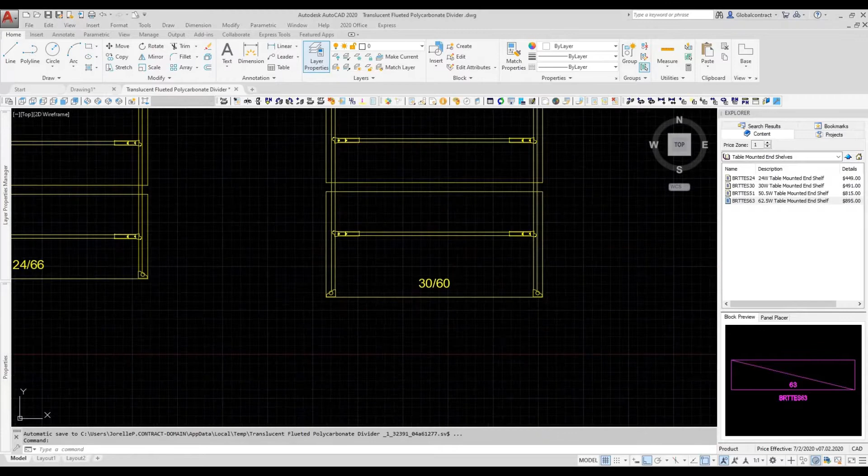It's just telling you the gaps. The 1 inch, approximately, is basically between the two back-to-back work surfaces. As you know, it will be overhang, and the radius and trim is charcoal finish only.

So I just placed some bridges tables and the old and new height adjustable tables. For Bridges, it is located under GCT, Global Contract. CBG represents the code for Bridges 2.

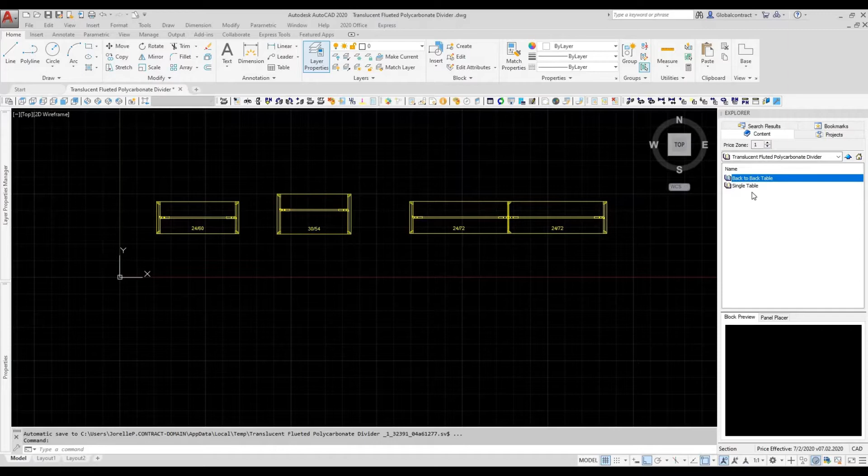It will be under dividers, and below here, translucent fluted polycarbonate divider. So when you're specifying, you will need to determine if it's a single or a back-to-back table.

Let's go to single table. Here it will ask you if you want to specify the 24 high or the 30. I'm just going to put a 30 high on this 24 by 60 work surface.

It will ask you then if it's for a 24 deep or a 30 deep. This one is a 24 deep, so I'm going to choose this. Now you will need to know what's the width of your work surface. This represents the width, so it's 60. I will need to choose 60.

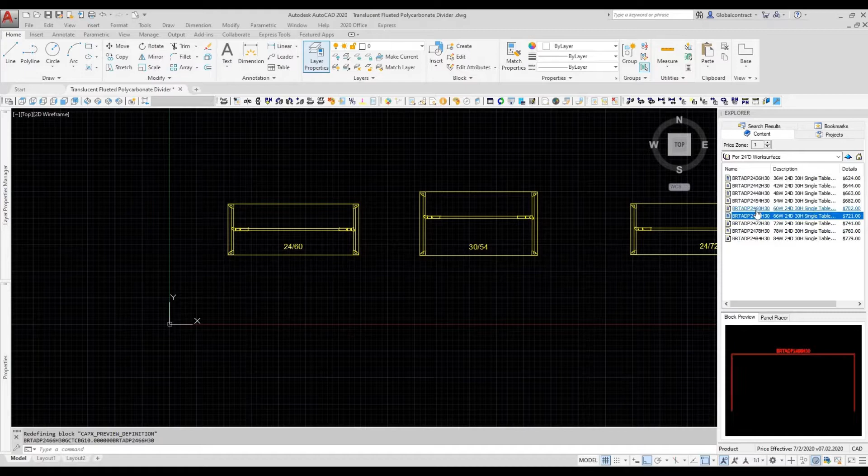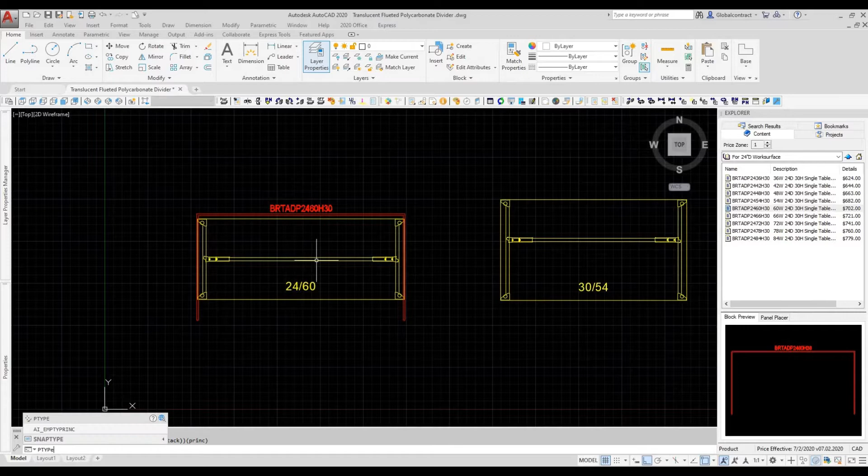So the insertion point will be at this end. In order to show you the nodes or the point better, you can type in PTYPE and then enter. It will ask you which point style you want, so I'm going to choose this so that I could show it to you better.

Next, I'm going to put a 24 high on this 30 deep, 54 wide work surface. Let's start it again. This is a single, so I need to go to single table.

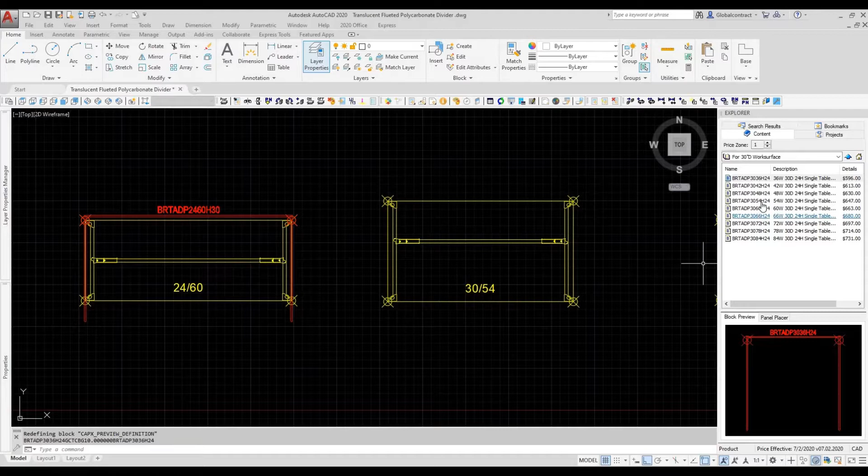I said I want a 24 high, so I'm going to choose this. This is a 30 deep, so I will choose this. Now I will need to know the width. This work surface is 54, so you will need to choose 54. Insertion point is at the end of the work surface.

Just to let you know how we determine this coding: BRT represents the bridges code, ADP represents the code that we assign for the divider. The first two numbers represent the depth. 54 represents the width. Then H is height, and then 24 - so H24 represents a height of 24.

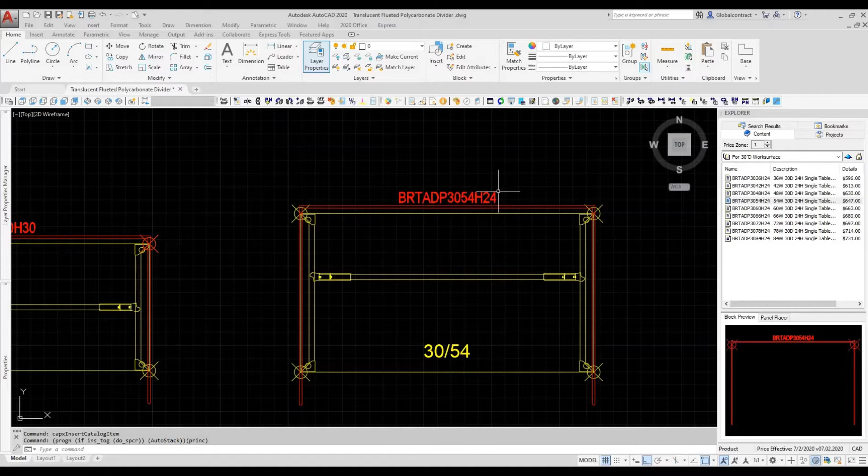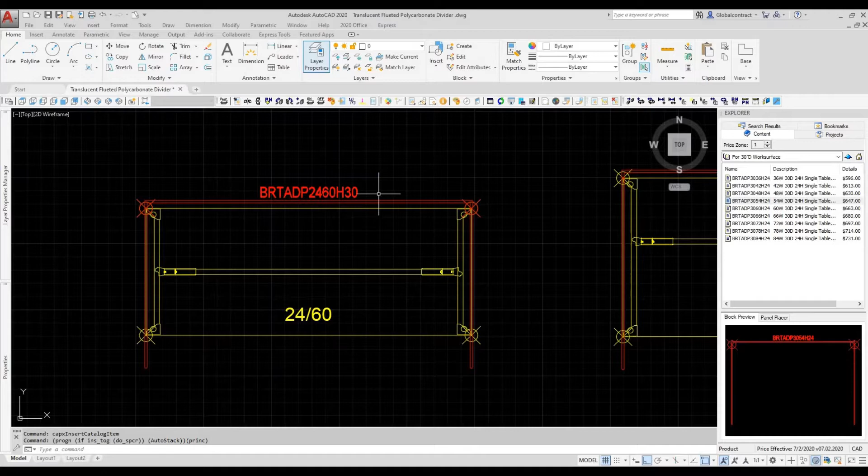Similar to this, BRT represents the bridges line, ADP represents what we chose for the divider. 24 is the depth, 60 wide, and height of 30. So now let's go - what if you have multiple tables side by side? Let's start it again. Single table - this is still a single table.

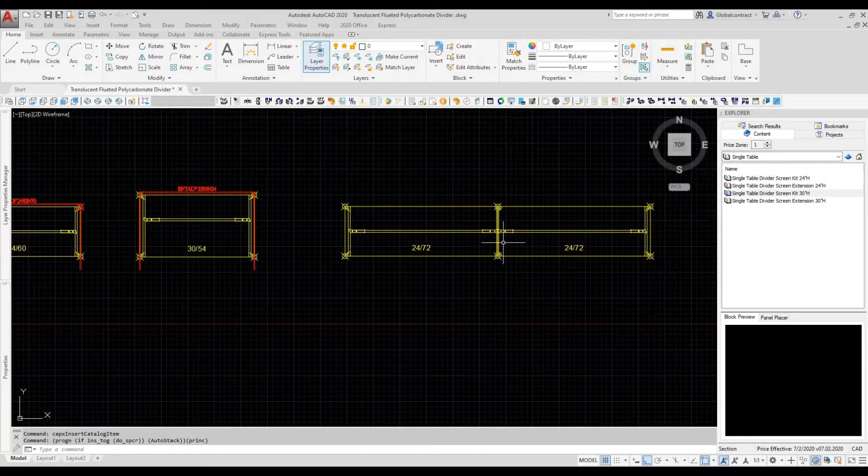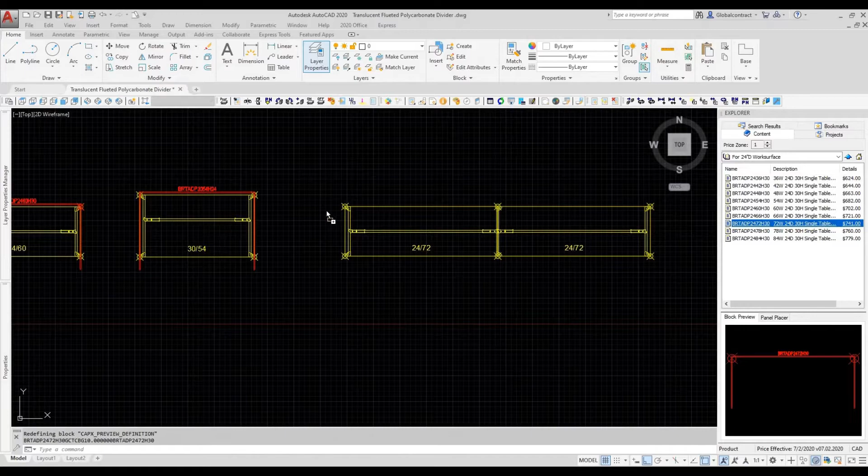So I'm gonna choose a 30 high for this. And then this is a 24 deep, so for 24D, that represents deep. And then this is a 72W, so let's specify this. Same thing. The node will be at the end, so that will be the insertion point for this.

So next, let's get the extension for this. Let's go back. So same, this is single. This is 30 high, as you can see, H30 high, 30. But now we need an extension, so you need to specify this. It will ask you if it's 24 deep, and then 72 wide, so we need a 72 wide, which is this one.

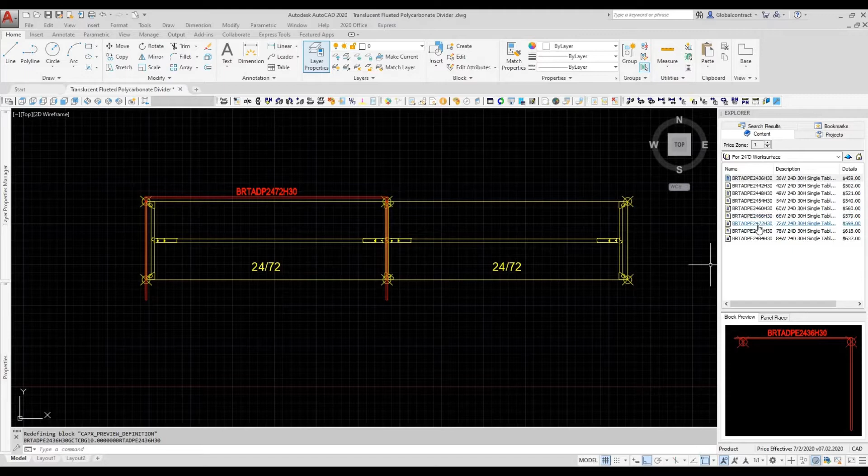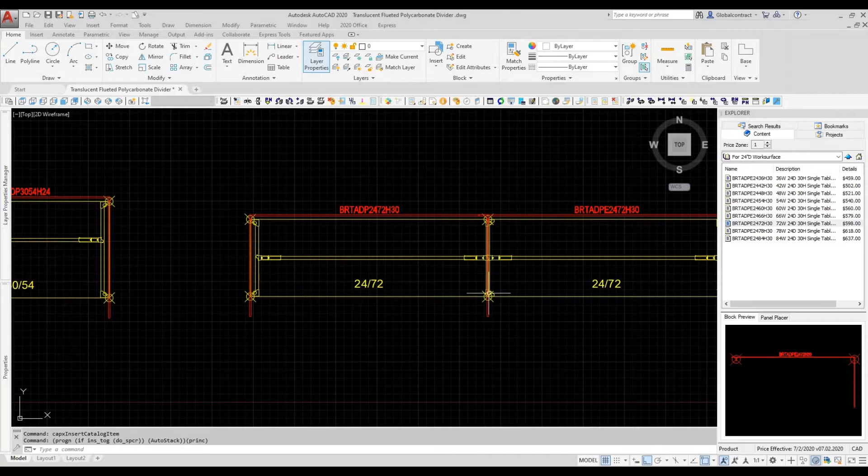Insertion point will be in the middle. And there you have it. So this is good to go. So that's how simple it is to specify this fluted. So all the connecting bracket will be included. Let's see this on a 3D view.

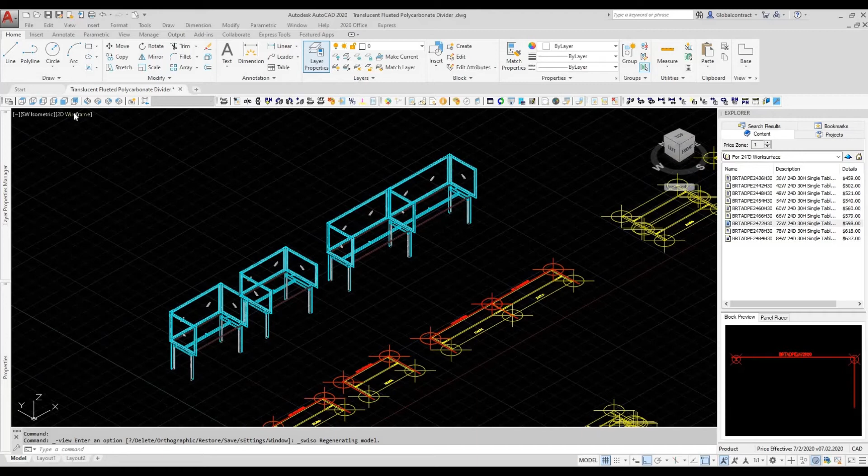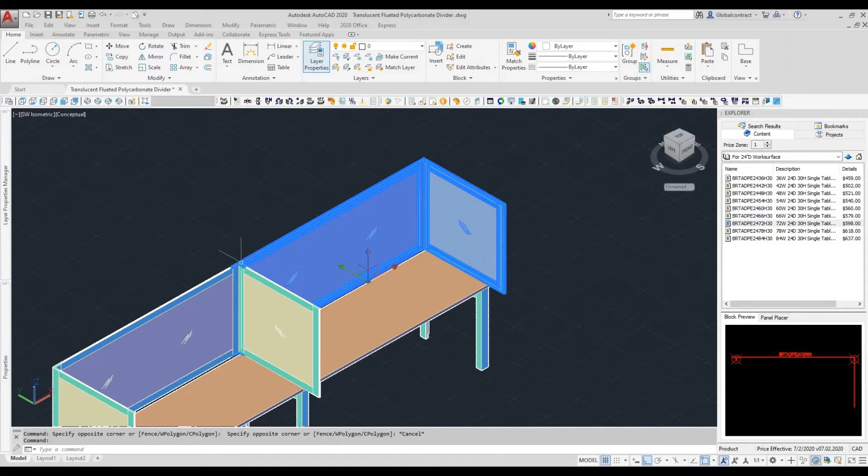So that's how it looks like. So it comes with the bracket. So we call this P bracket. So the kit will come with that. And even with the bracket, the C bracket, that's what we call this, the one that wraps around the work surface.

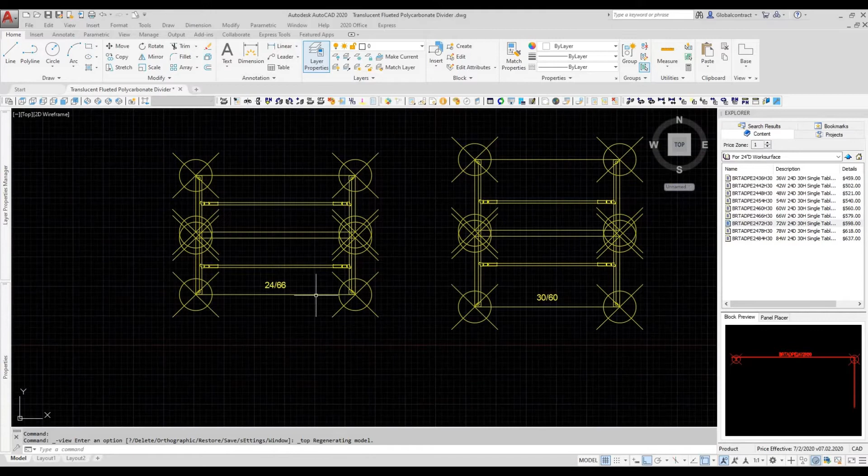So let's go back. So now what we have here is the back-to-back work surface. So now let's go back here. So because this is a back-to-back, we need to go to Back to Back Table. So now you choose if you want a 24 high or a 30 high, whatever you want. So I'll choose 24 high.

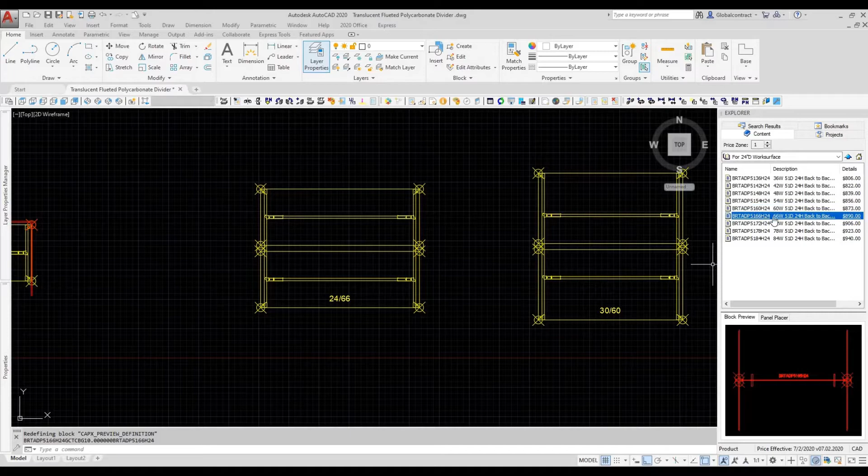It will ask you again for the depth, so this one a 24, and this is a 66 wide. So I'm gonna choose 66 here, which is this one. Insertion point will be this node. So basically this corner of the work surface.

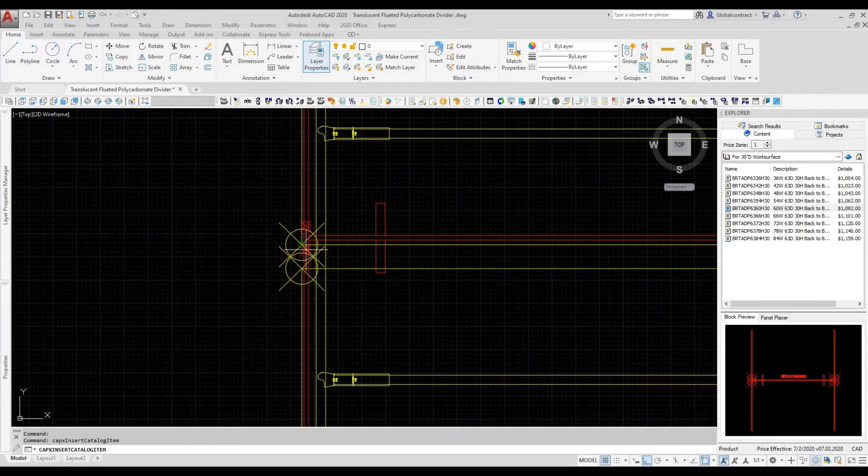Let's do this one. So this is a back-to-back work surface. Let's go with 30 high. This is 30 deep. And then now this is 60 wide. So we need to see, you can see it from the description as well. So 60. Same thing, the insertion point will be on this corner of the first work surface.

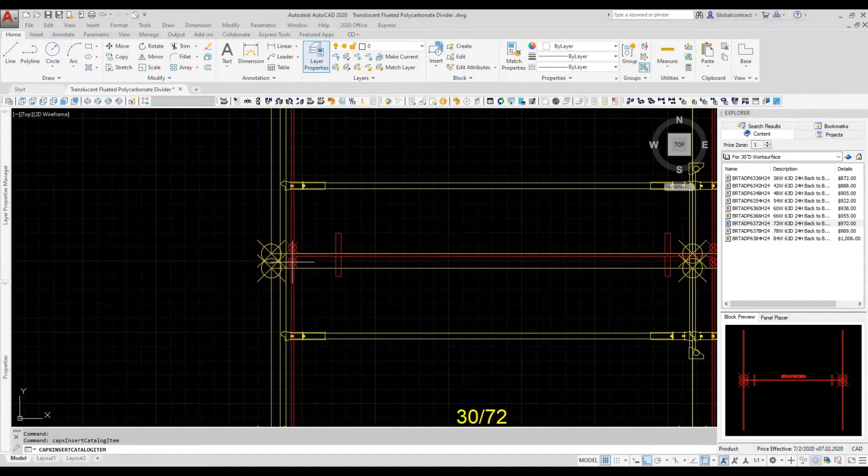So next, a back-to-back 4-pod work surface. So back-to-back table, let's put in 24 high. So we need to specify first this. This is 30 deep, so specify 30 deep. And this is a 72 wide work surface, so we need to use a 72 wide. Insertion point, same location, the first work surface, and it will be in this corner.

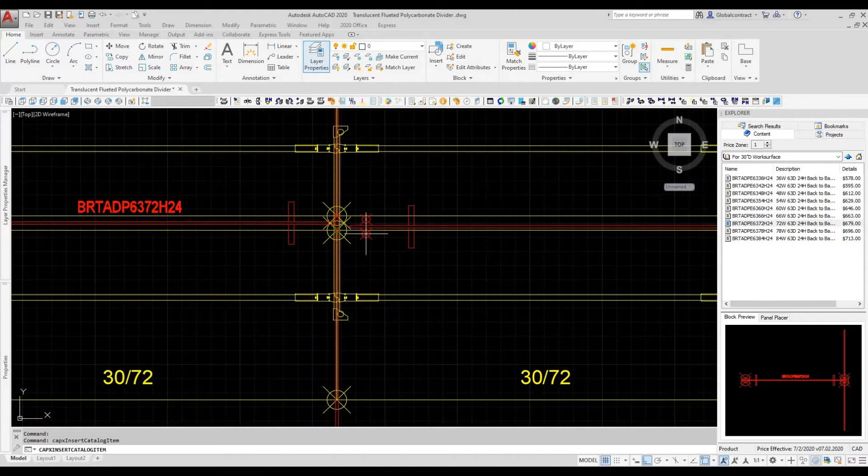Next, we need the extension. So we use a 24 high, I know that because H24. So now we need an extension. This is 30 deep, and then this is a 72 wide. Insertion point will be in the middle of this.

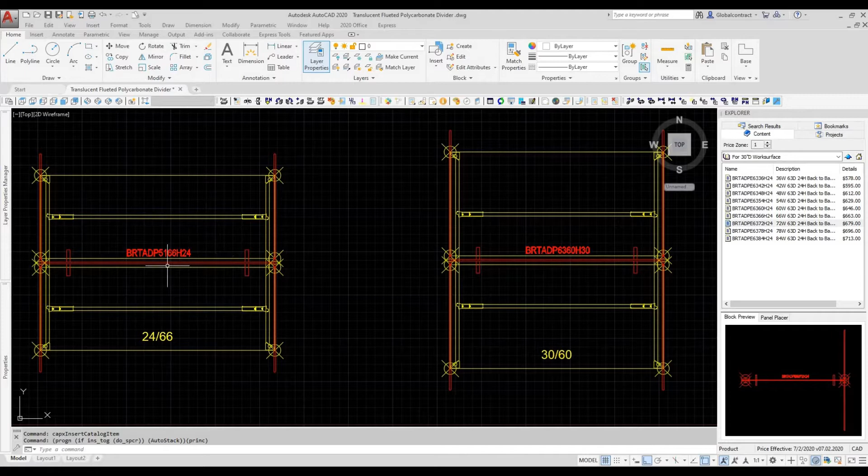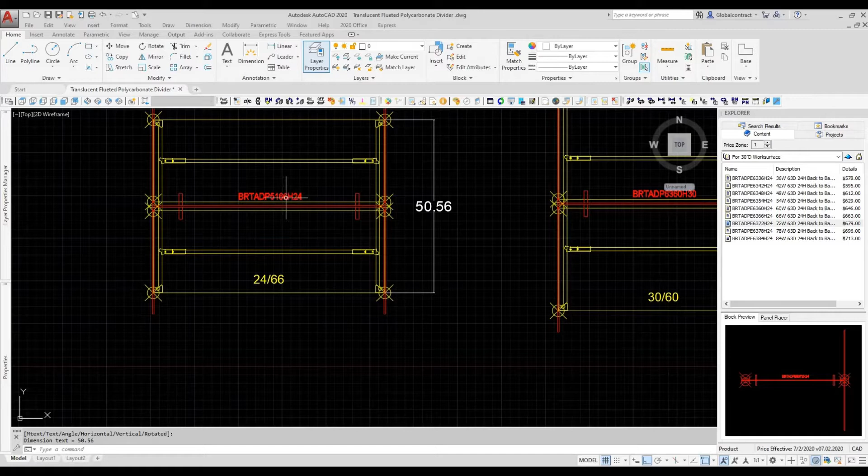So let's understand the coding for a back-to-back work surface. BRT is for the bridges, ADP is for the divider, so that's our code. 51 if it's a 24 deep. Why 51? Because that's the total dimension for our back-to-back, so 50.5, so we put a nominal size to round it up. So 51 for this, and then 66 represents the width. And then H24 is the height of the divider from work surface at the top and to the top of the divider.

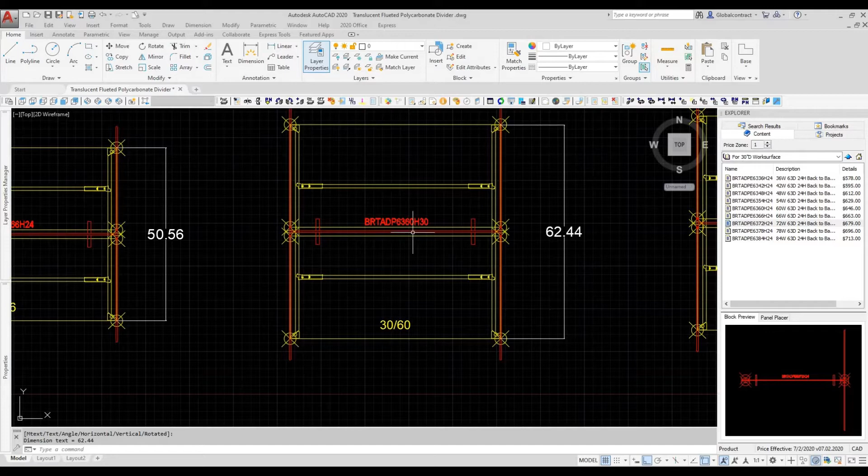Same as here, BRT, ADP, and then it will be 63 if you have 30 deep work surface. And then 60 will be the width, and then H30 represents the height of the divider. So this will be 62.5, which we round out to 63 for nominal size.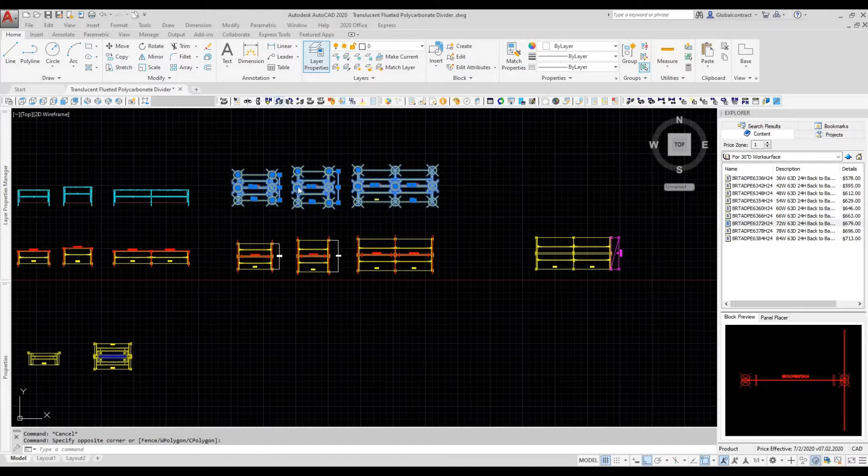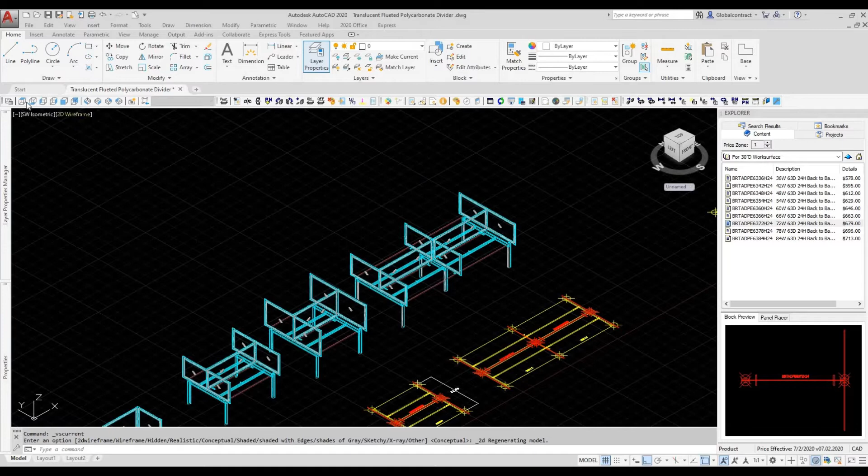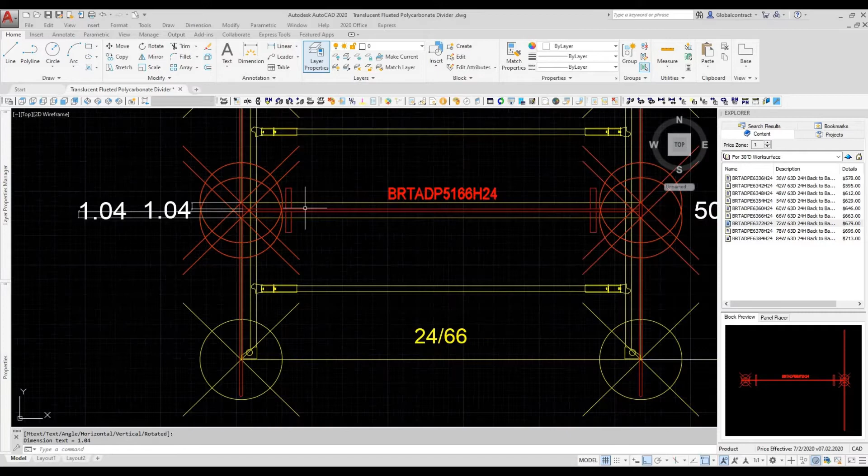Let's check this on 3D view. So for back-to-back, this will be the look. Also, let's put a dimension from here to here. As you remember, in the key features, it said that it's approximately 1 inch. So you have a gap of 1 inch at each side, so it's more than enough for cords and those kind of stuff.

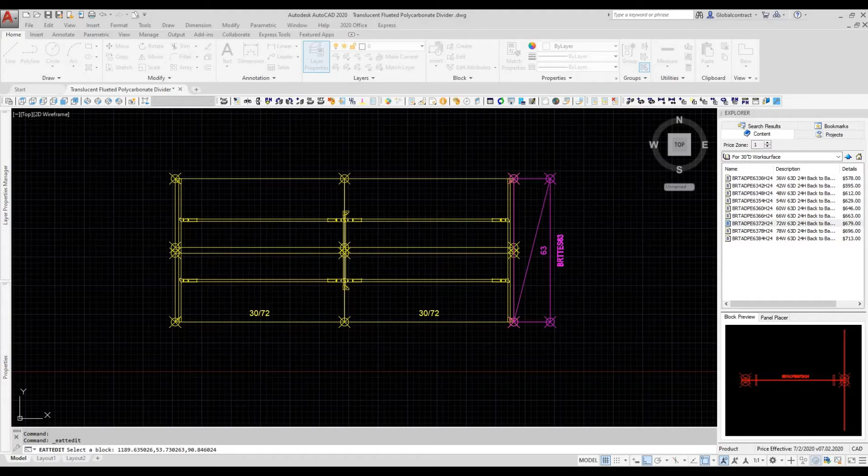So what if you have this situation where you have back-to-back 4-pod, but you have a shelf. So this shelf is called the table-mounted end shelf. So this is the look of that.

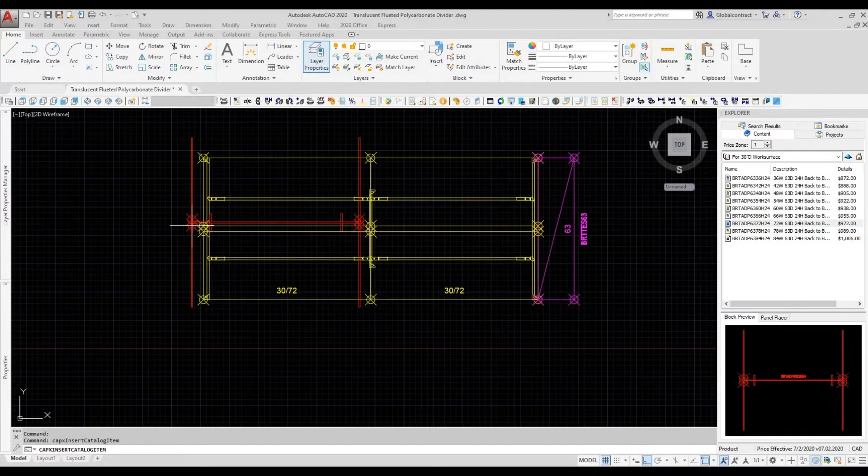So in this way, let's specify the dividers first. Back-to-back, I'll just choose a 24. This is a 30 deep work surface, and 72. Let's specify the extension, 30 deep and 72. Let's look at it on 3D.

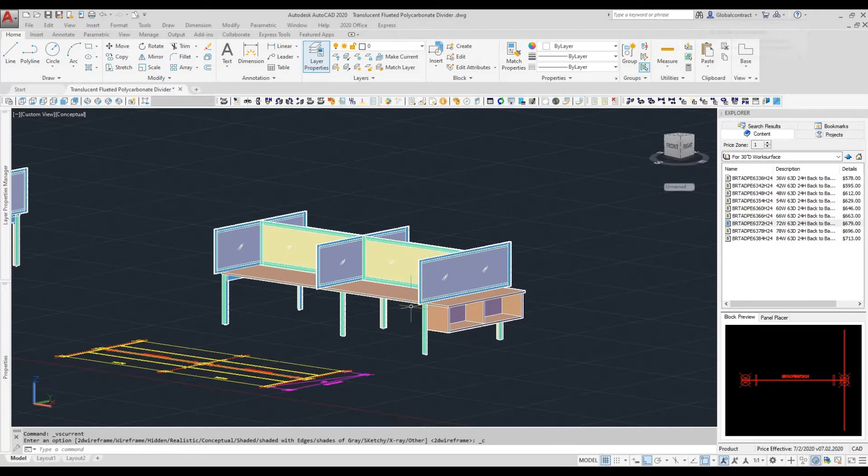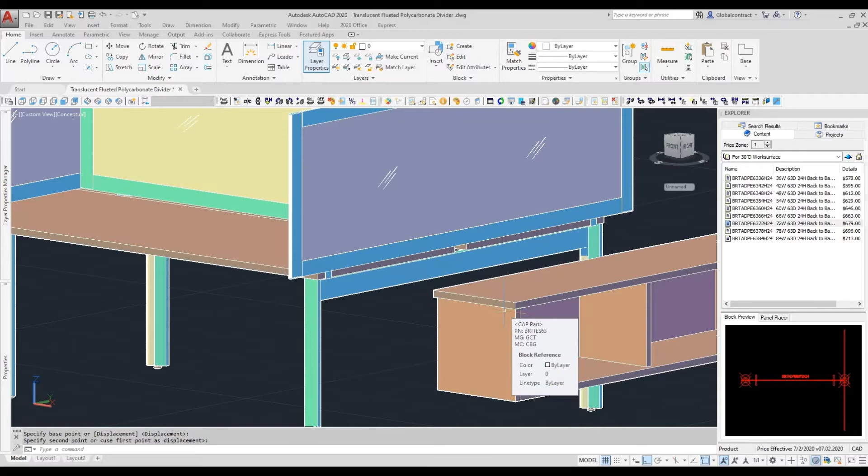So here we have a situation where you want to add this end shelf for bridges. What happened is the bracket will interfere with the installation of this end shelf. So we told engineering about this issue and they came up with a kit to change the bracket. What they asked us to do is specify the BRTM kit, and that will fix the issue. It will come with the bracket that will fix it, and you will be able to install the shelf.

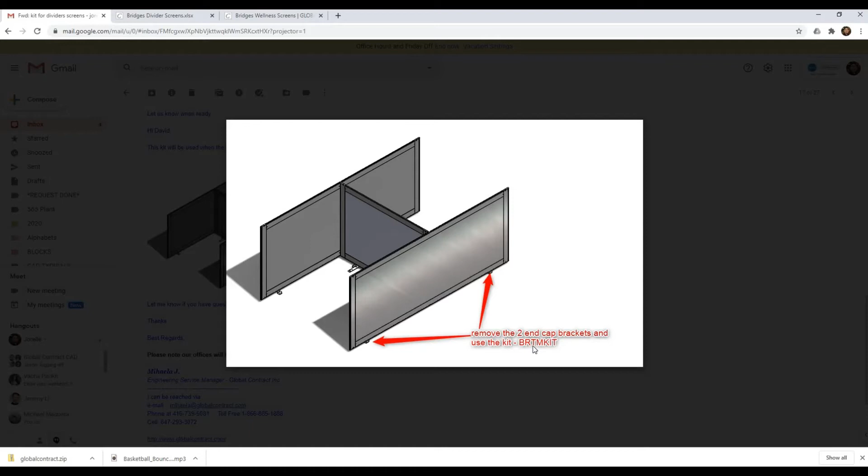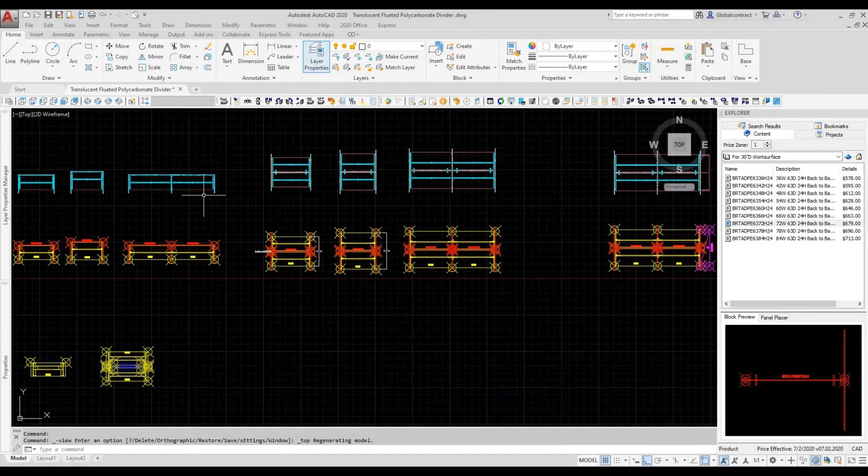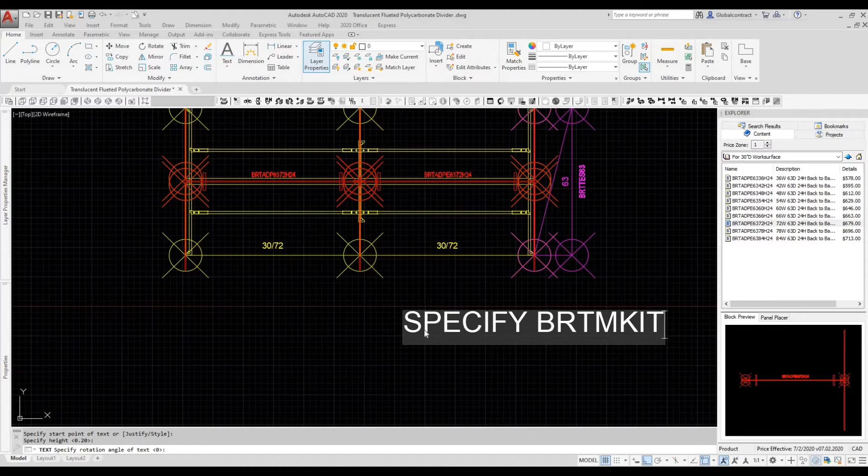In terms of pricing, you can email us with the price. This one will not be on the price list, but the good thing is you will be able to specify this or just manually add it to your BOM. For now, message us if you have those kind of situations. We'll be able to help you and provide you with the pricing. Now at least you have the code for this application. Let's put a note here: email us for pricing.

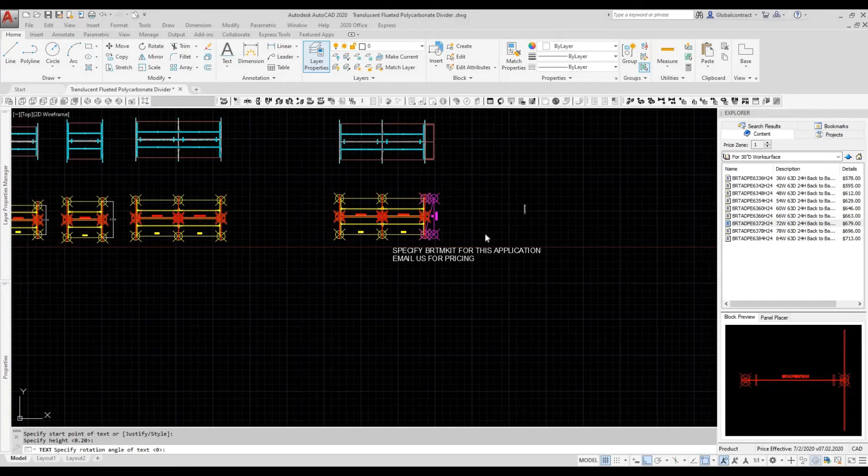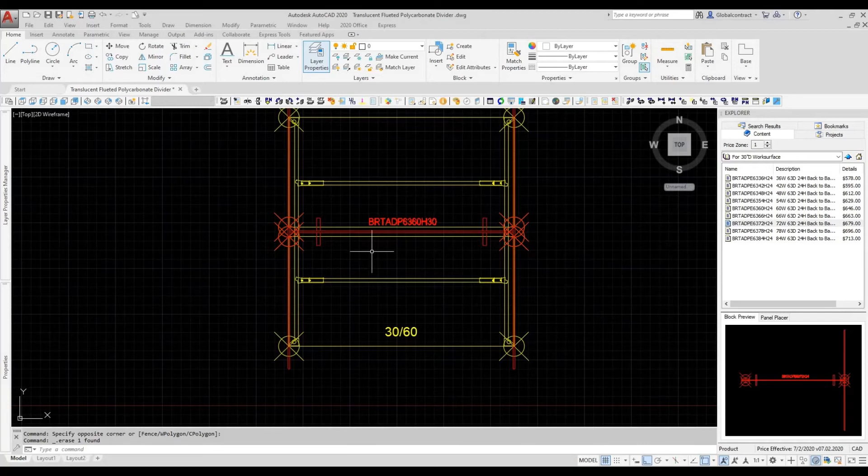So next situation is, what if you want to add a ceiling post for this application? Right now we have 63... deep, or 30 deep each, and a 60 wide work surface. Now let's delete this first.

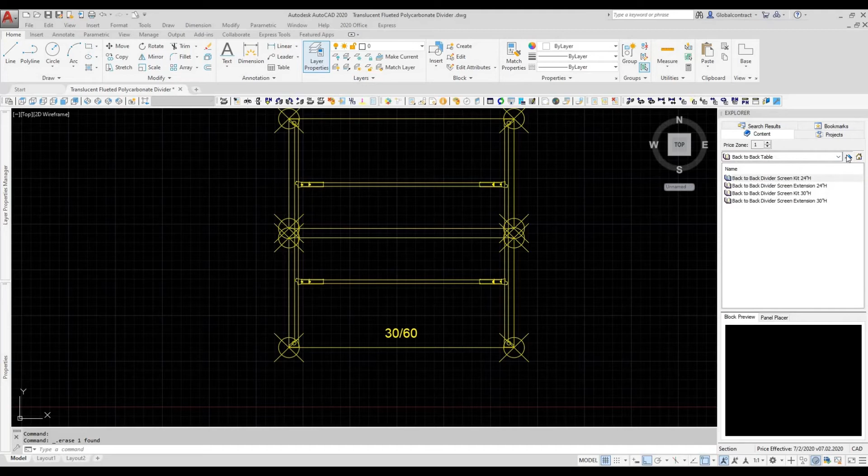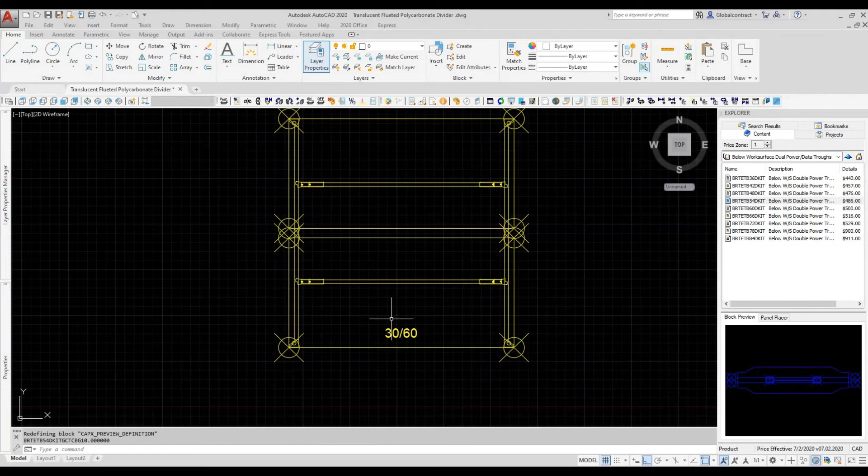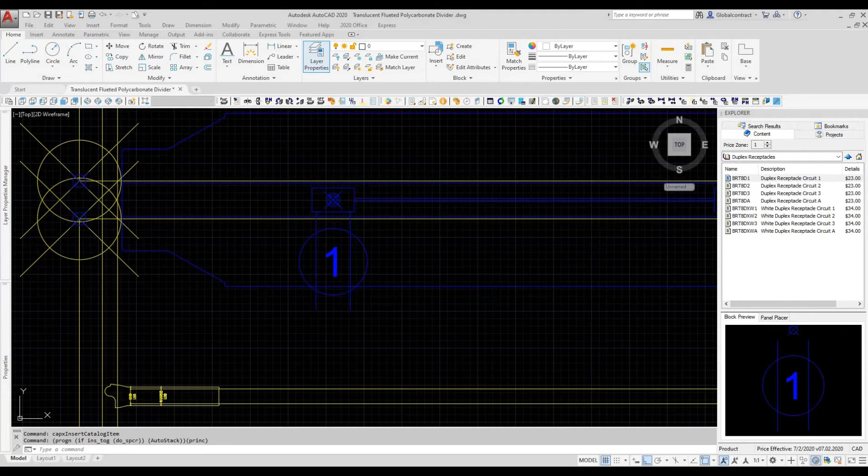Let's add in the electrical. Let's go to electrical. The fluted divider only works with below power. So here we have 60, so below power, below housing, we're going to use 60 as well. Let's add in our duplex, so 1 and A.

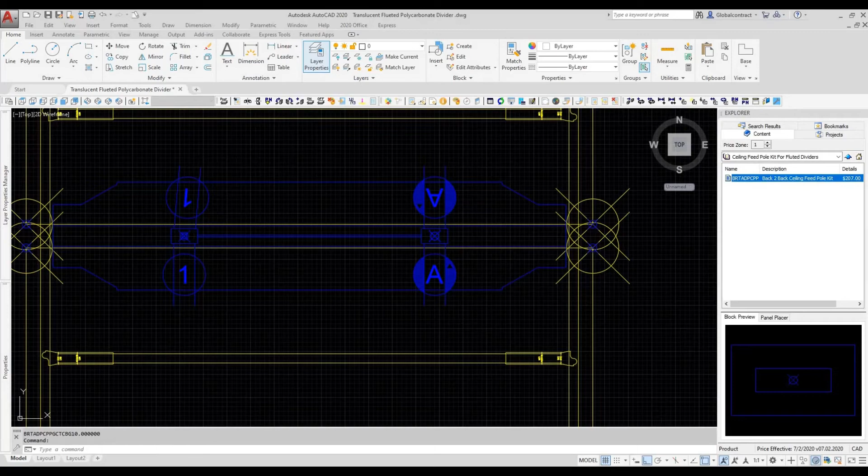And let's put in our post. It will be located right here, ceiling pole—we have the standard and we have the ceiling pole for fluted. So choose this and just place it right here.

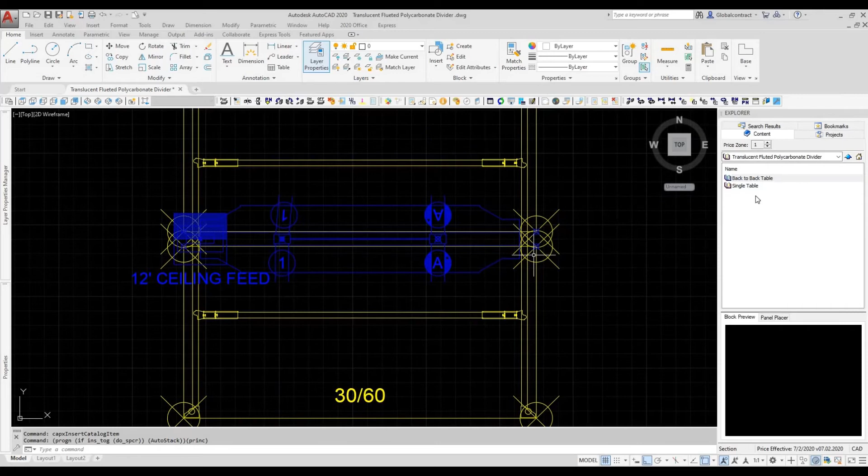Let's add in the ceiling feed, and then we need to add the dividers. So this is a back-to-back, either 24 or 30 high—I'm going to choose 24. This is a 30 deep, so this is a 60 wide work surface. But if you're putting a ceiling pole, you will need to specify 6 inches shorter, so you will need to specify a 54 with this.

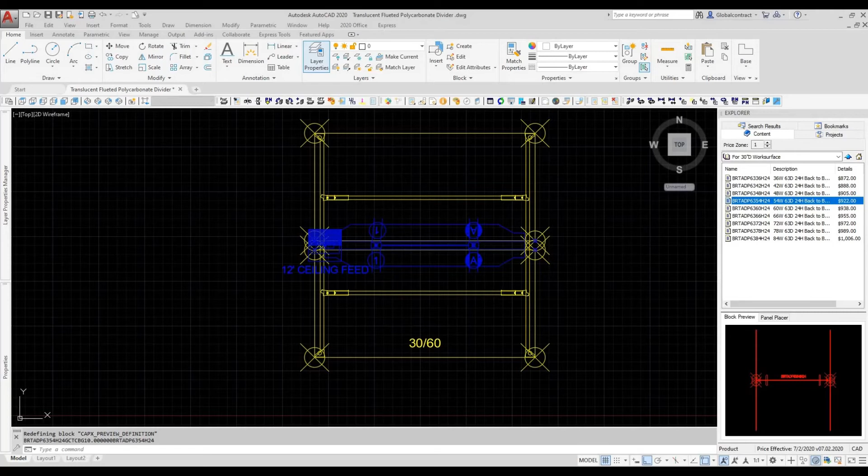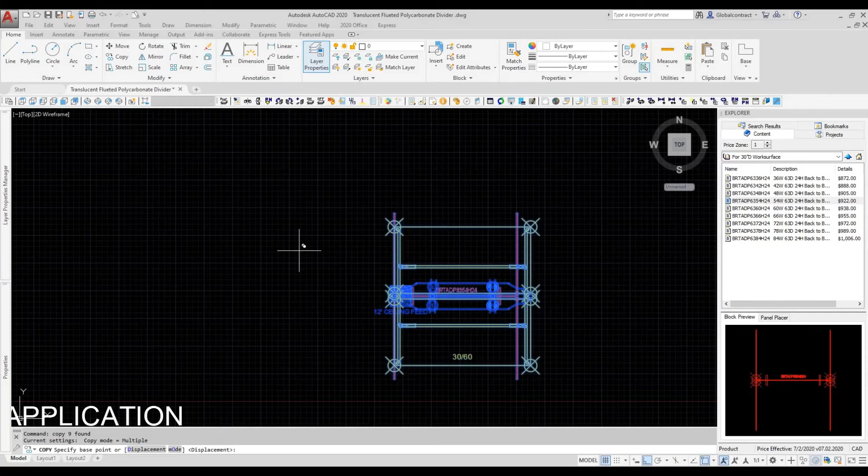So now it will look like this. At the moment, we don't have changeable graphics that will fix this, but at least you'll know that this will work. What you can also do is copy this, make this 3D, and just select the dividers and then explode it, or use this.

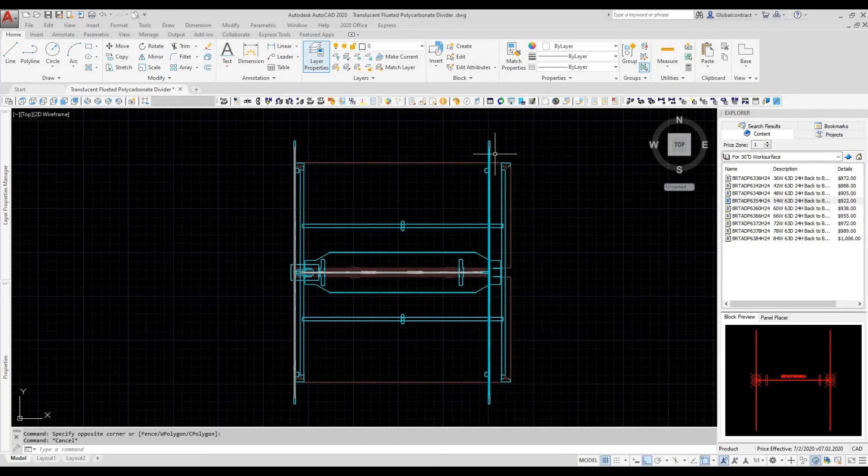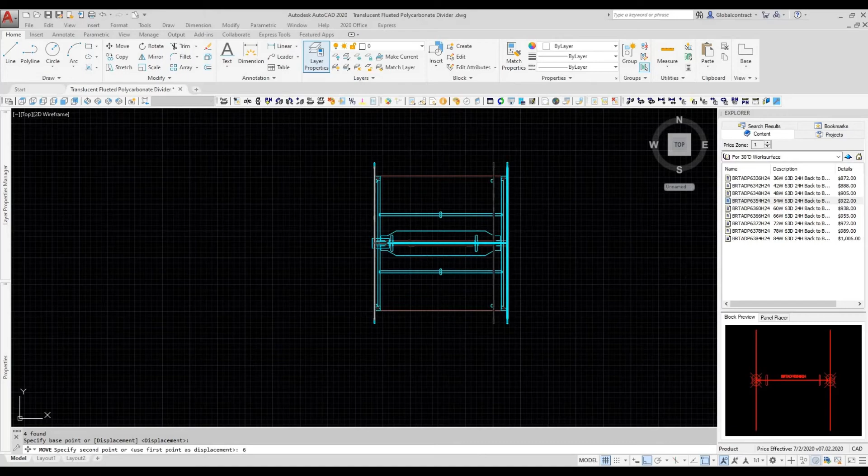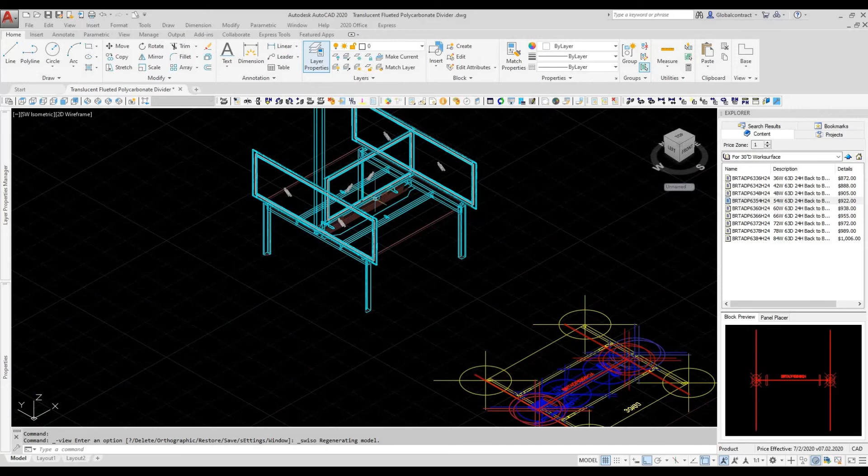So now you're able to move this. Let's move this and the one in the middle. Type in move, and then just move it 6 inches. Let's move this as well—move 6 inches. Let's look at it in 3D. And there you have it.

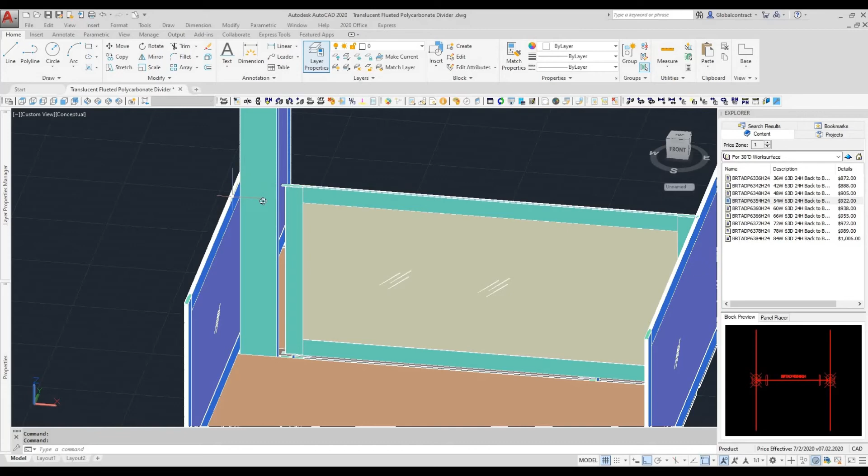So when you specify the post for fluted, it will come with the bracket to replace this and another bracket to hold this divider. So it will come as a kit as well.

So next, let's just put a note here: 6 inches shorter if with a post.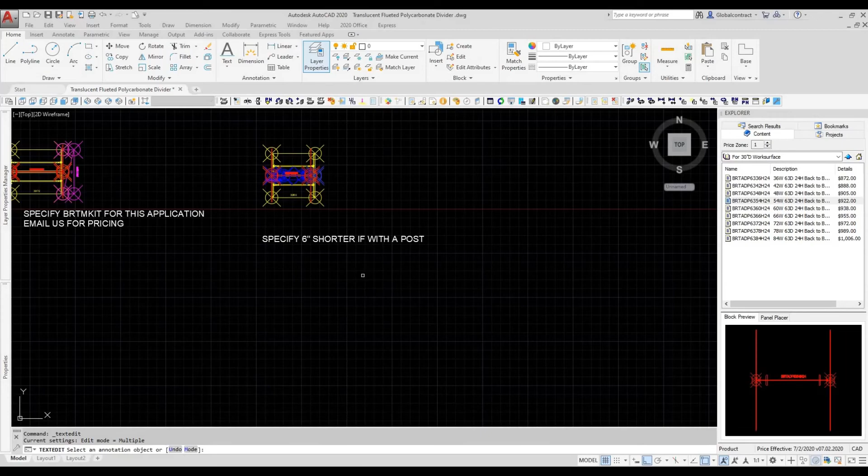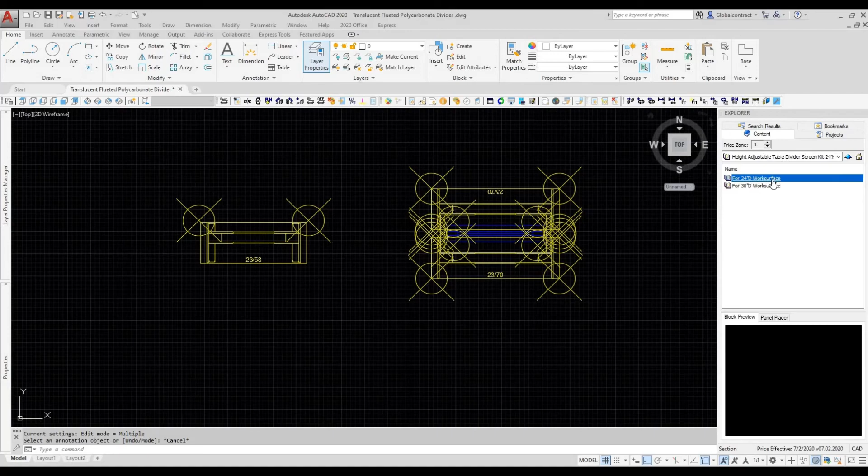Height adjustable table, and then it's under dividers and FreeFit translucent fluted dividers. Either 24 or 30, it's up to you—I'm going to choose 24 high. This is a 24 deep height adjustable table, so I'm going to choose 24, and the width is this is 60.

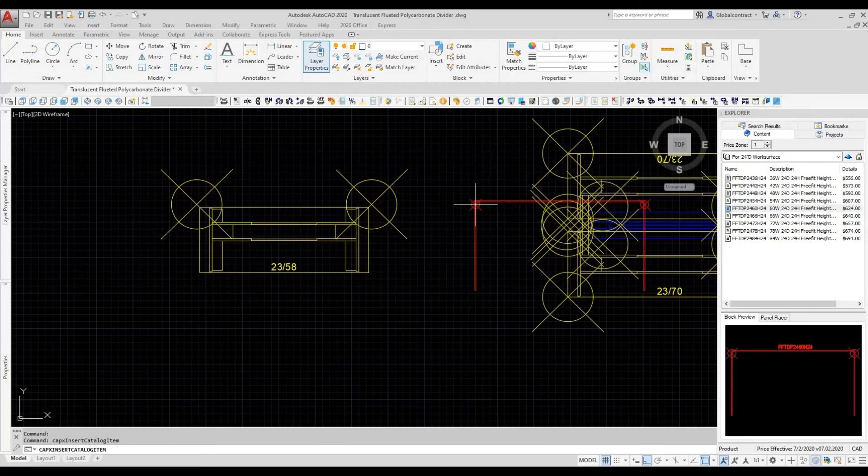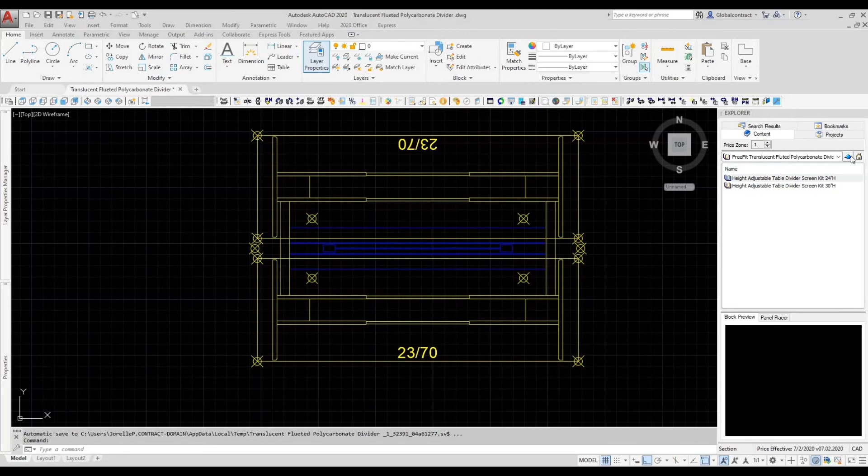So the 23 and 58—it's because the height adjustable table is 1 inch shorter on the edge. Okay, so now this is 60, so choose 60. You will need to place it at this endpoint, at the corner of the work surface. So next, we're going to put it on a back-to-back. As you notice, the FreeFit doesn't ask you if this is a single or a back-to-back, because it will be placed on a single work surface as well, even if it's back-to-back.

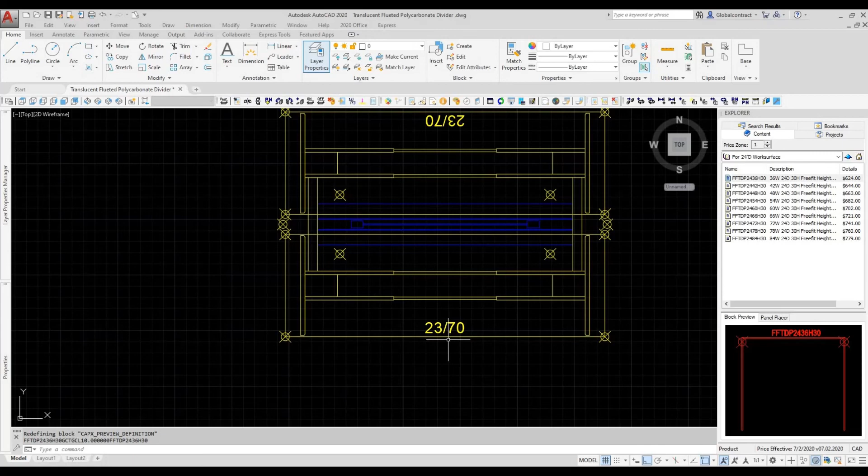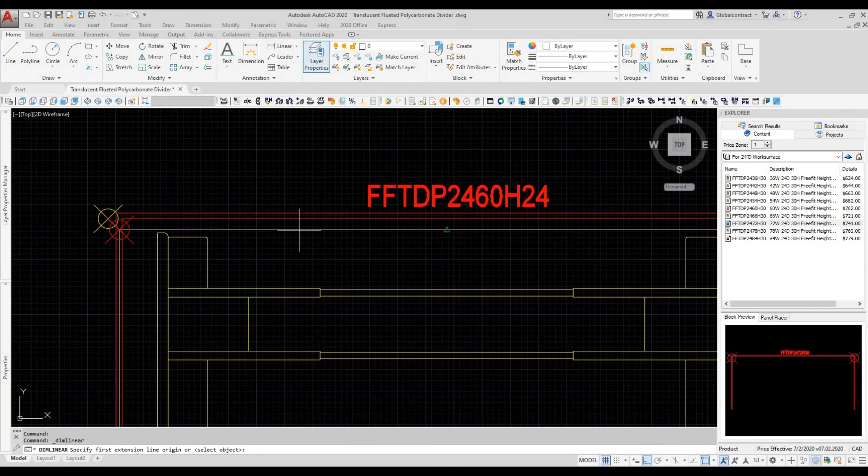So now let's try and put in 30 high. It will ask you if this is 24 or 30 deep—this is a 24, and then this is a 72 wide, so let's specify 72 wide. Choose this node for insertion, and also this insertion. So the gap is around 1 inch—that's enough for cords or monitor arm, those kind of stuff.

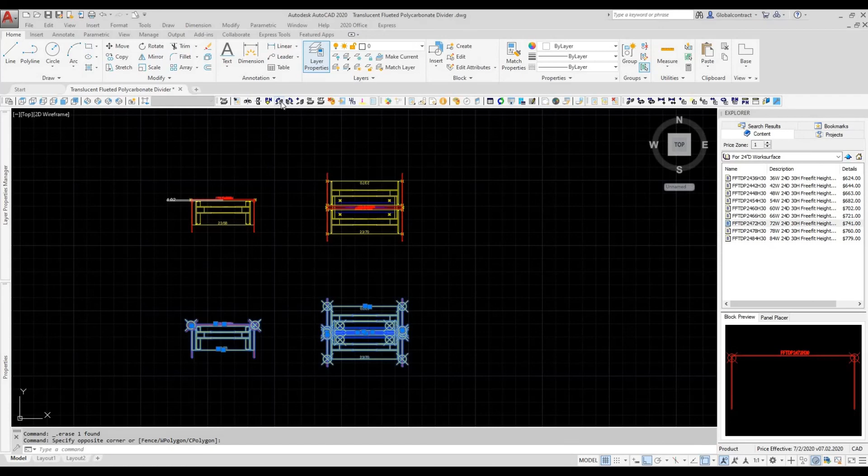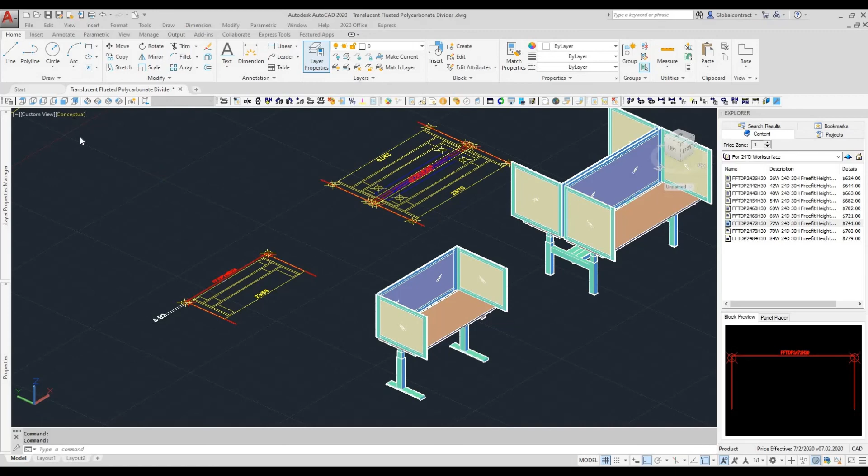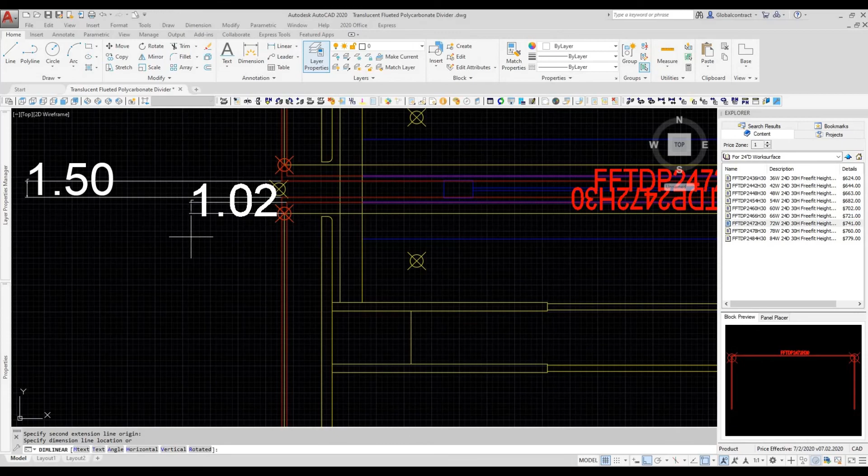Lastly, let's look at it in 3D. So there you have it, the fluted for the new and old height adjustable table. Let's just see the gap—the remaining gap is around 1.5. So there you have it.